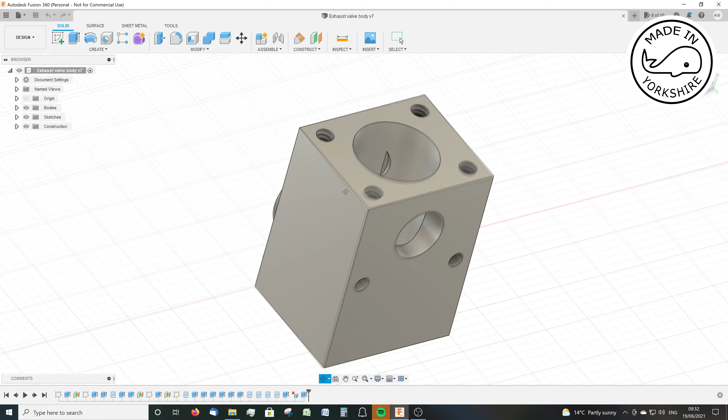So I've put the drawings into Fusion 360, and this is a drawing of the exhaust valve body. Now I haven't included the exhaust valve seat in here. Instead of including it, I've drilled a hole right through the body, which will take the valve cage, which I'll make separately.

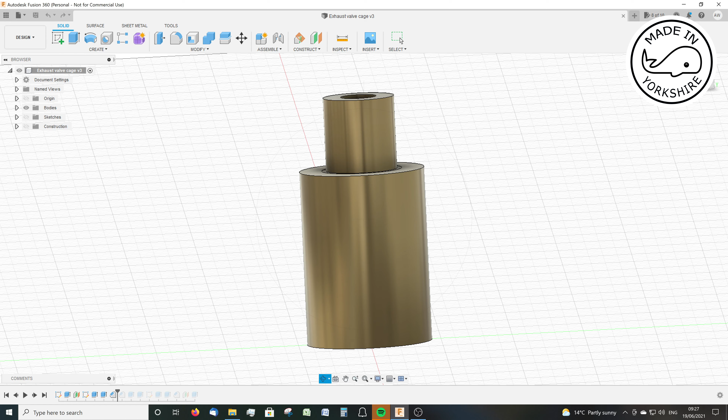So this is a drawing of the exhaust valve cage made out of phosphor bronze, which I'll make separately. Now the valve seat on this is quite wide, and in reality it's probably going to be less than that. Okay, so this is the completed exhaust valve assembly. So this is the body incorporating the valve cage that's been pressed into the base of it.

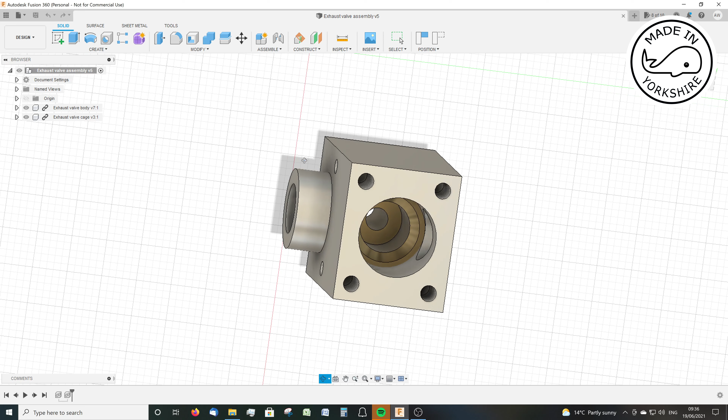And as you can see, the valve seat is quite low in there, so how you can machine that as a complete unit, I don't know. And as part of the machining process, I'll bore a hole through into the valve cage at that point.

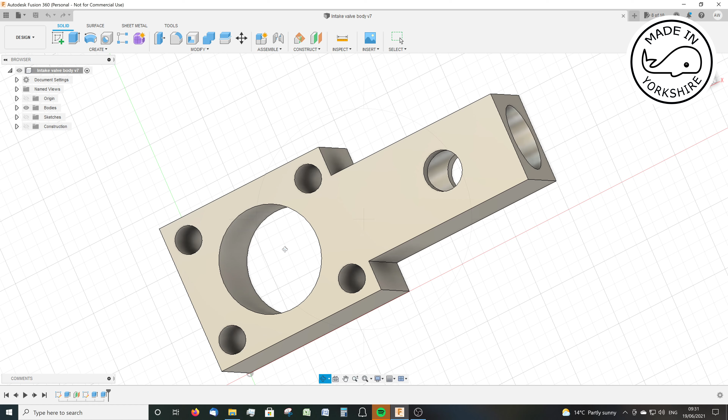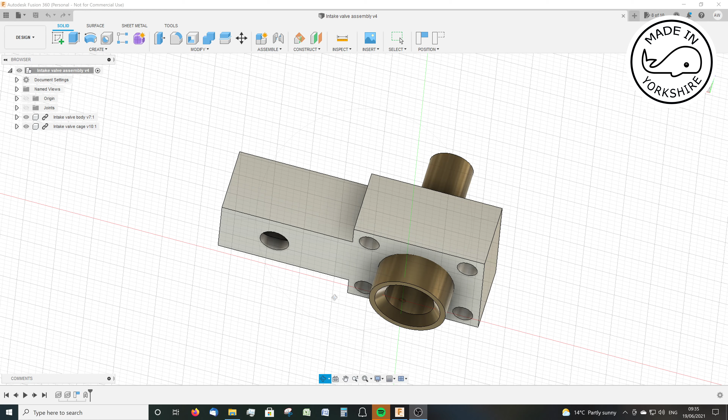So this is the intake valve assembly, and as you can see the cage has been pressed into the body. Far simpler assembly, and you can see the hole needs to be bored into the cage as part of the machining process, and the valve seat on this again is probably too wide, and it'll be thinner than that in reality. So that's the plan, so let's see how we get on machining it.

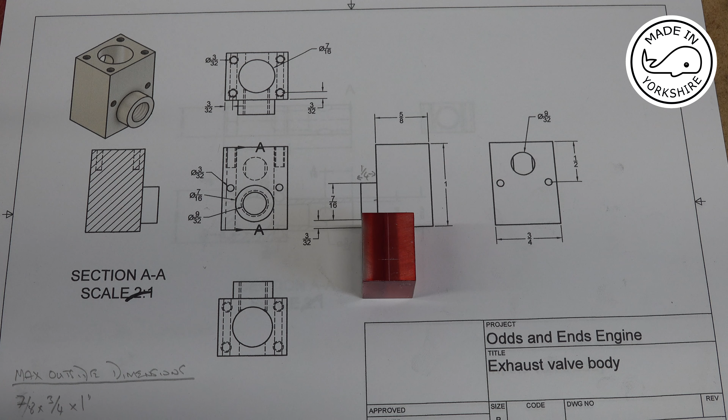Well, these drawings should have come out on a scale of 2:1, but the printer refused to do that, so I think they're on a scale of about 1.5 to 1. Anyway, never mind. So first of all, I'm going to start on the exhaust valve body, and I'm going to machine this boss here first of all. So I'll put it in the 4-jaw chuck on the lathe.

Well, it's taken me ages centering this up in the 4-jaw chuck, but got there in the end, I think. Okay, so the outside diameter of this boss needs to be 7/16 of an inch, so if I divide that by 2 I'll get 7/32. Now I've put the tool tip just short of the centre mark, and what I'm going to do now is draw the cross slide back by 7/32 of an inch, which is 0.218.

One, two, one, eight. So if I set that to 0 now, I know exactly where I need to cut up to, and it'll be just shy of 7/16. So it'll be just a bit bigger than that, but I can then use the cutting tool just to clean it up.

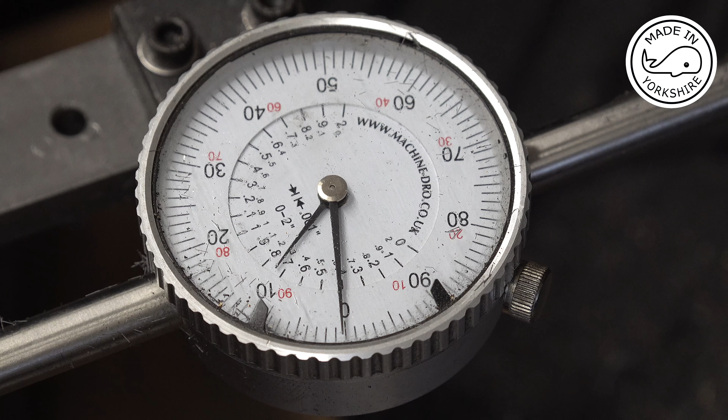So I've just rotated the piece by hand and just scratched the mark with the tool, and that is just slightly greater than 7/16. So I'm happy to proceed. And I've set the carriage stop to 1/4 inch in.

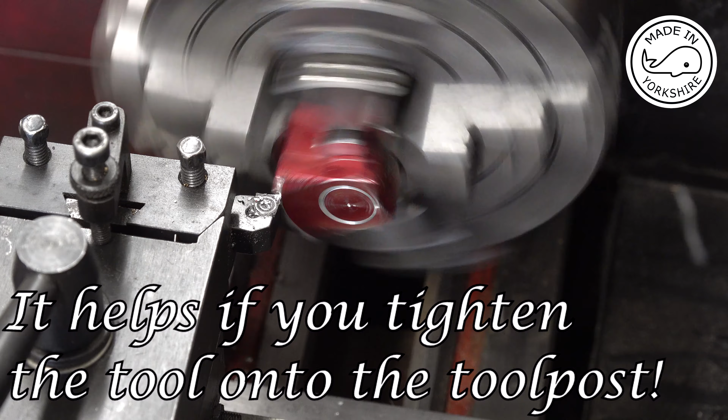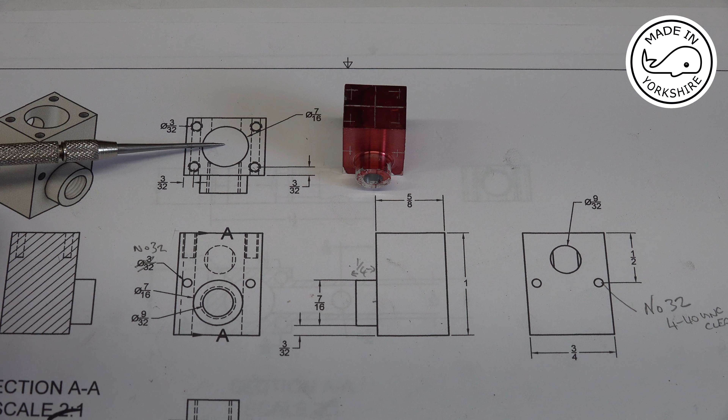Now this will eventually be tapped to 5/16 by 26, but what I'll do while it's on the lathe is I'll just drill a pilot hole around about 6mm in diameter, but I'll do all that off camera. Okay, so now I need to go over to the mill and drill and ream the hole to take the valve cage, so that will have an outside diameter of 7/16 of an inch there.

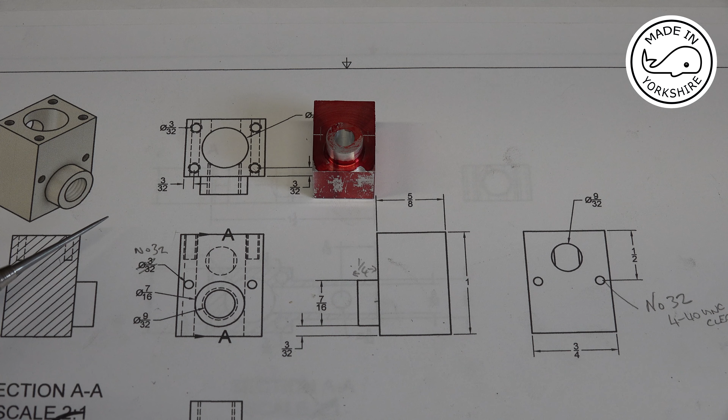At the same time, on the mill, I'll drill these holes through here to secure it to the cylinder block, and they need to be number 32, 4-40 UNC clear. And what else am I going to do? Oh yeah, I'm going to drill this hole here in the back. So this is the hole for the valve cage, and I've already centre drilled.

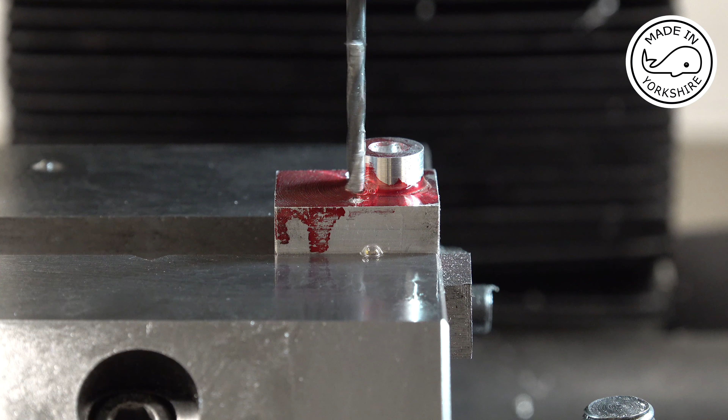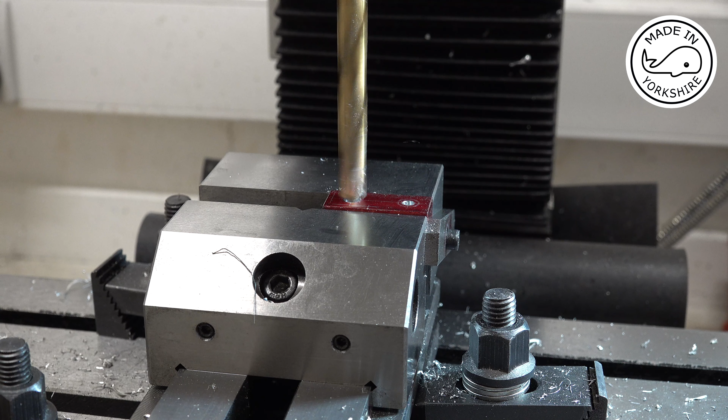So I can't do much more on this until I insert the valve cage. And now onto the intake valve body. So a lot of this is just drilling holes in the right place. So this is 4-40 UNC clear.

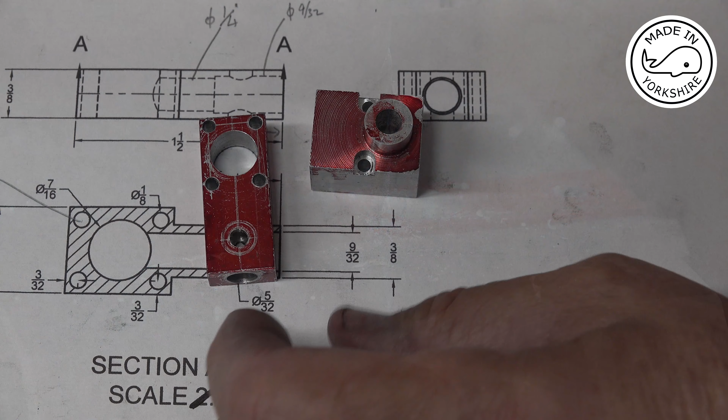Well, it seems to be going to plan. So the idea is that the inlet valve cage will fit in here. And once it's fitted, I can then drill through this hole into it. And the inlet valve cage will protrude very slightly so that it will fit into this recess here. And then I can bolt it together.

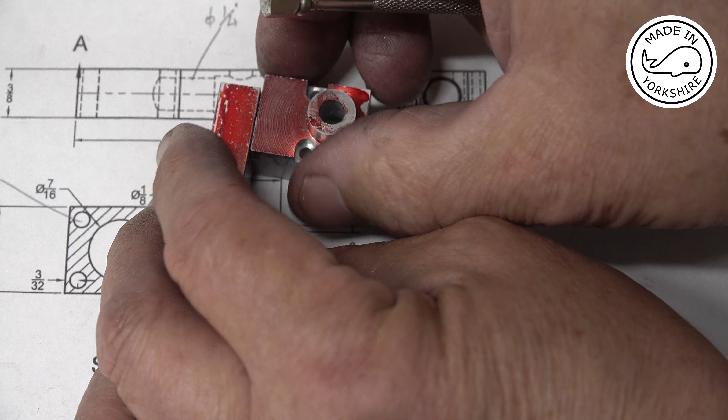And for the exhaust valve cage, that will fit in there. Once that's fitted, I can then drill through this hole here into the valve cage. So that's the plan. So I need to make some valve cages and valves.

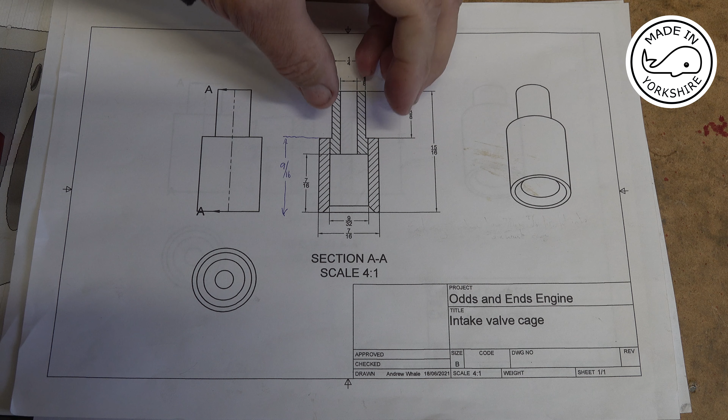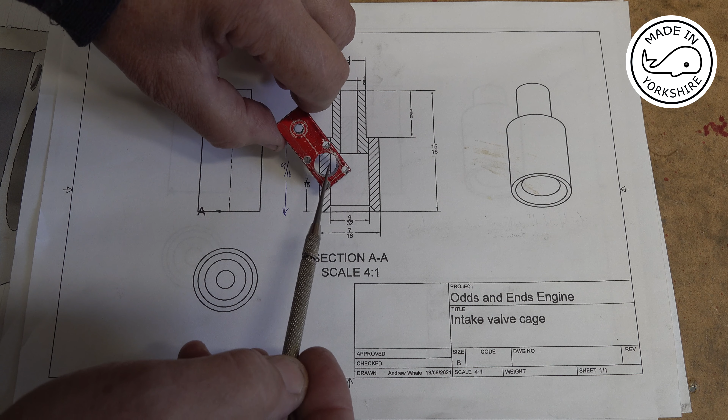Okay, so for the valve cages I'm going to hold a piece of phosphor bronze in a collet chuck at this end, and I'll first of all open up this hole here, then I'll drill and ream this hole to be 1/8 of an inch. Once I've done that, I'll then turn the outside diameter down to be around about 1/2 thou over the actual hole I made here. So I'm going to get a really good interference fit, hopefully.

Once I've done that, I'll then cut the valve seat at 45 degrees. Then I can part it off, then I can switch it round and then just turn this end down here.

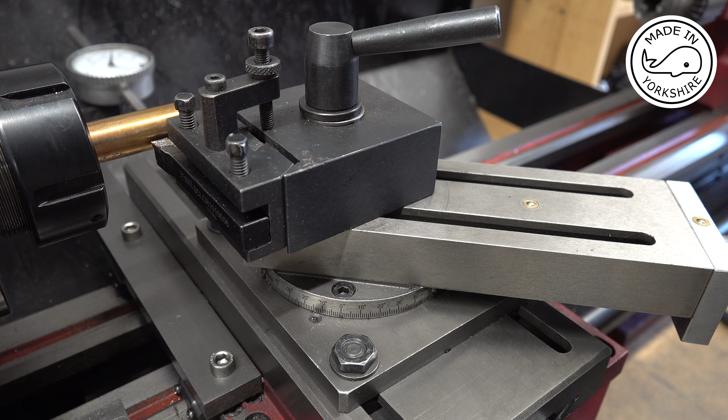Okay, so before undertaking any machining, I decided to turn the compound slide round to 45 degrees, and to make sure I got an exact 45 degree angle, I used the following method. I moved the tool up to this edge of this phosphor bronze, and then I withdrew the compound slide by 11mm. Now, it could be anything really, but I'll go 1, 2, 3, 4, 5, 6, 7, 8, 9, 10, 11.

Now, if I take the sine of 45, that's 0.7071, and 11mm equates to 0.433 of an inch. So if I multiply the sine of 45 by 0.433, I get 0.306. So the gap here has got to be 0.306.

So all I did was to put my slip gauges in here to measure that gap. And after a bit of fiddling around, I've managed to get that gap to be spot on 0.306. So I'm happy the compound slide is set to 45 degrees. And another way to measure that gap is to use a gauge.

So I've already centre drilled, so what I need to do is open this up now to 9/32 of an inch in diameter to a length of 7/16.

So what I need to do now is to drill and ream the top end to 1/8 of an inch in diameter. So this is a 3mm drill bit. So I'll drill to a length of 1/2 an inch, and later on I'll ream it off camera because it's a hand reamer. Oops. Let's try again.

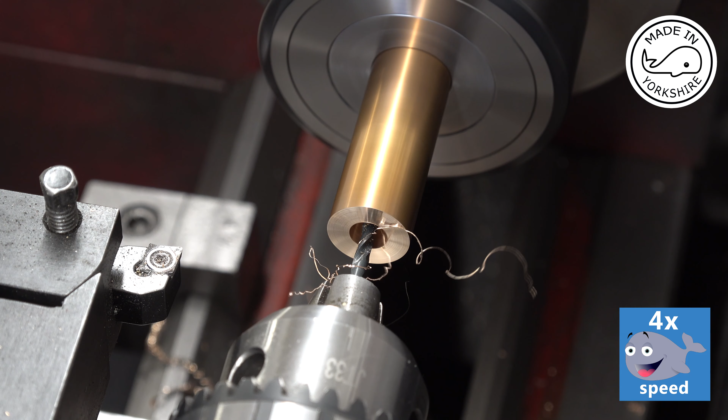So this needs to be reduced to 1/2 thou over the size of that.

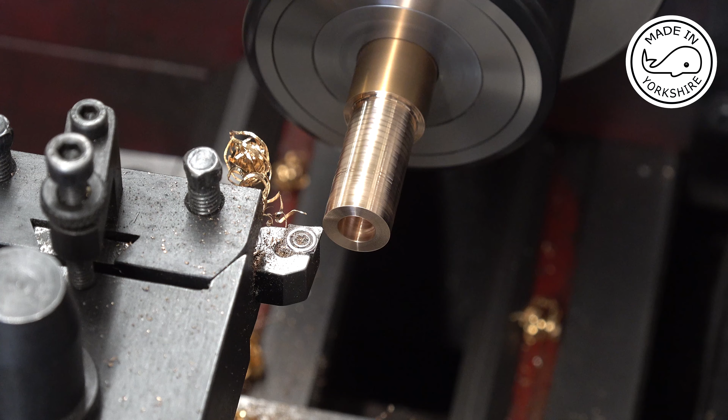Well, that just slips on there on the end, and the difference between the end and the main bit is 1/2 of a thou. So I think that'll be a good tight fit, an interference fit. So I'll leave it at that. So now I need to cut this valve seat.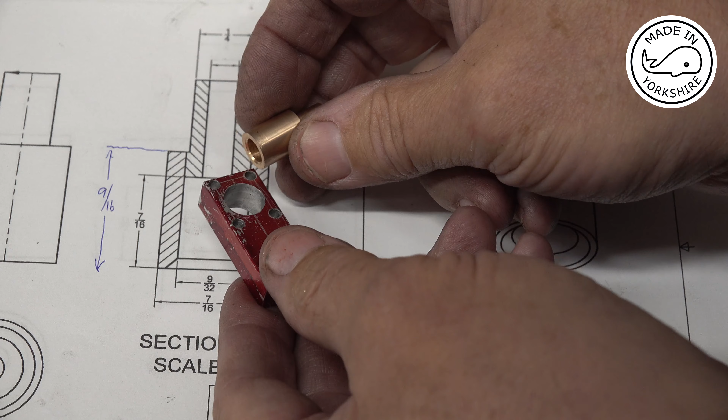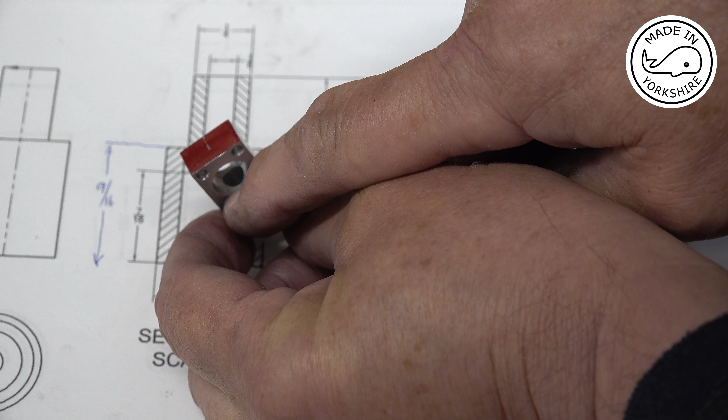And now the only slight reservation I've got here is when I press this in, down here, I don't know whether you can see that, there's not that much metal there between the hole and the outside edge, and obviously if that isn't airtight then I'll have a leak. In hindsight, if I was to make it again, I'd make it a bit thicker. But anyway, we are where we are.

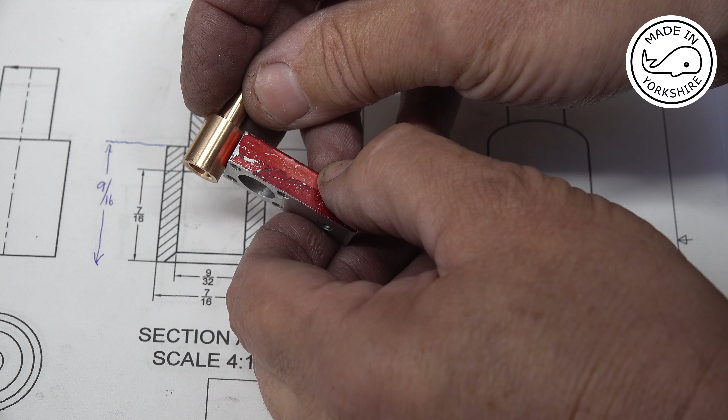So what I'm going to do is put that in the fridge and put that in probably the oven, and take them out and see if I can just press them in, and that will go flush with that. That's the plan. Well, the press fit went okay, so now I just need to drill into the cage with this 1/4 inch drill bit.

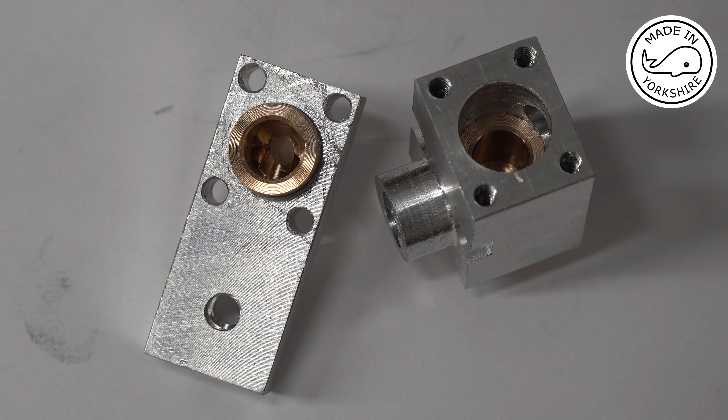Well, they've turned out pretty good, I think, and the valve seats I've cut to roughly the Jerry Howell specification, which is just around 20 thou, probably a bit bigger than 20 thou, and how you can machine that valve seat in there, in that position, I've no idea. But anyway, they look good, and that's how they joined together, bolted through.

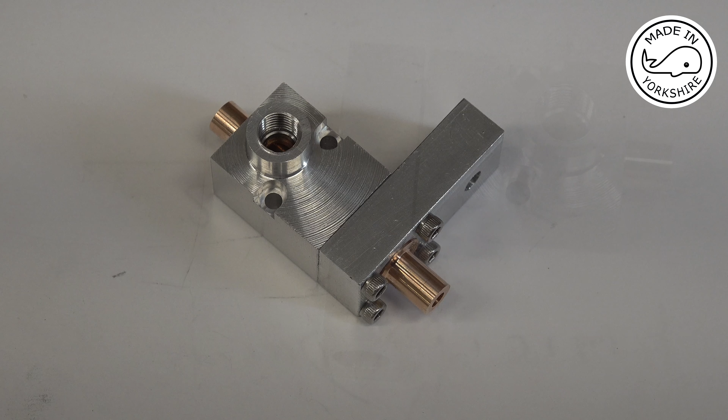And that's it bolted together, and that's where the fuel mixer will go once I've made it. It looks pretty good, I think.

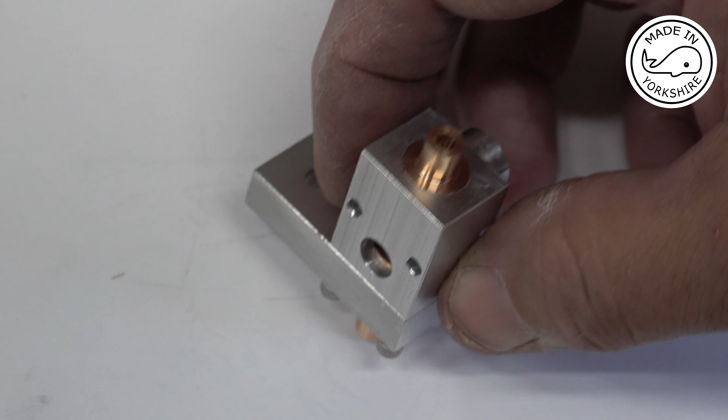Well, I must say that turned out to be quite fiddly, but I got there in the end, and to be honest, a year ago I wouldn't have even considered modifying the drawing, but I guess with this one I had little option, because I didn't have a clue how to cut that valve seat inside the body. But in my next video I'll be covering the valves and the springs, and hopefully I'll be able to test the compression somehow.